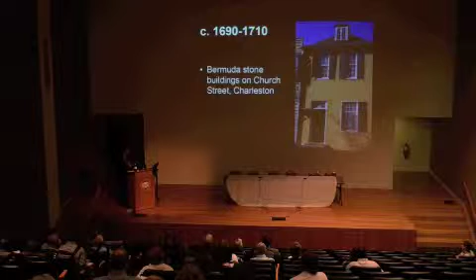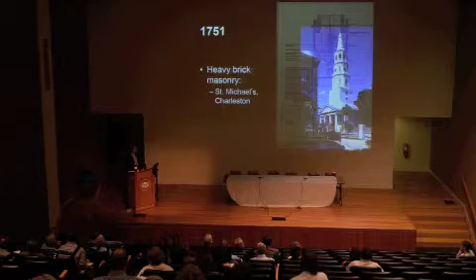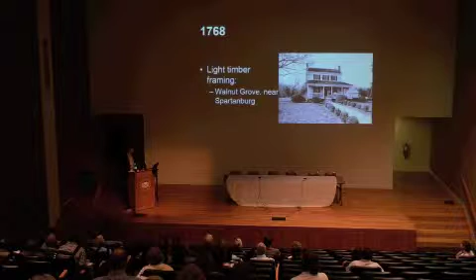1751, St. Michael's, heavy brick masonry. This building suffered significantly in Hurricane Hugo and had an awful lot of work putting things back together again. In the upstate, 1768, a light timber framing building up near Spartanburg.

Here's one I think some of you will recognize that has had one or two fascinating issues, because these are not structural problems. This is creep, and creep in masonry. We'll be talking about creep in masonry today.

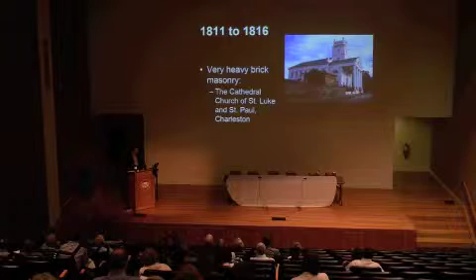The Cathedral Church of St. Luke and St. Paul, heavy brick masonry, and has had significant soil settlement issues. The trusses were damaged as a result of that.

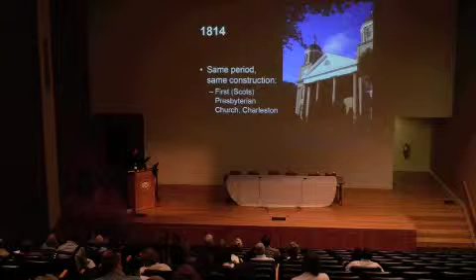First Scots has had a tremendous number of issues. One of the more interesting things is that—let's see if I can find the pointer on here. Yeah, there we go. If you look up here at the truss on the portico, if you climb up inside, you'll find that truss in particular is still smashed to pieces by a cannonball.

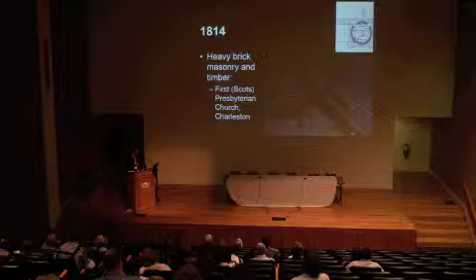So that's 1814. The towers are also tied together. They had some pretty significant earthquake damage. This is one that I know rather well, that's had some pretty interesting and significant structural issues.

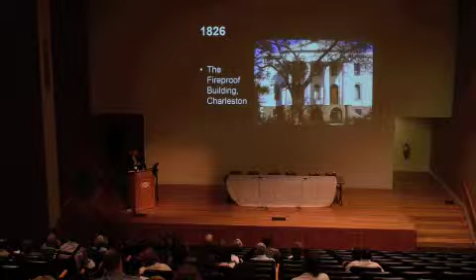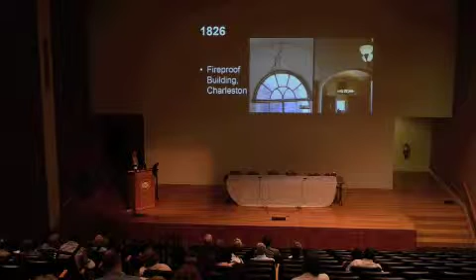12 years later, the fireproof building, Robert Mills, started to move on us, and we found that this thing was seeing some pretty interesting cracking. Fortunately, the South Carolina Historical Society has done a great job of dealing with the issues in that building.

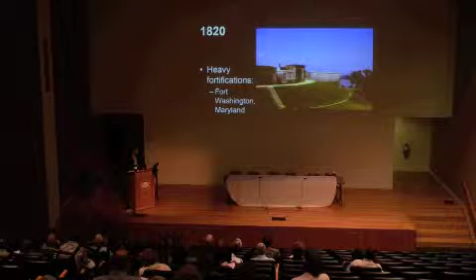There are examples of one of the owners that has really taken the bull by the horns and said, let's deal with it and get it right. And they did. 1820, we've also worked on a fair number of heavy fortifications that have more than their share of problems.

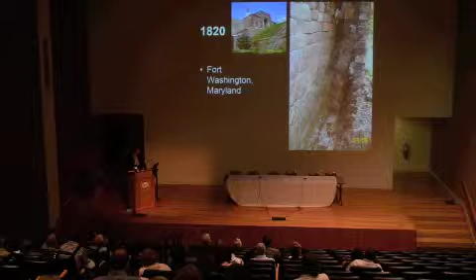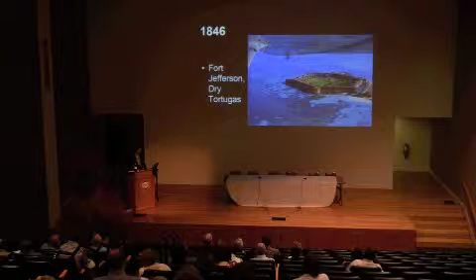When you see brick walls start to delaminate like this, then you know you've got something you've got to deal with. You really don't have a choice when you get something going on like that. Fort Jefferson, I've had more fun playing with down on Dry Tortugas and done a lot of work down there. That thing has had major portions of the fort separate, and we've had to rebuild parts of those.

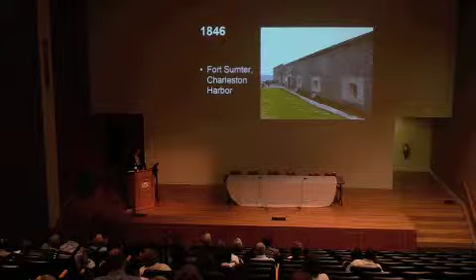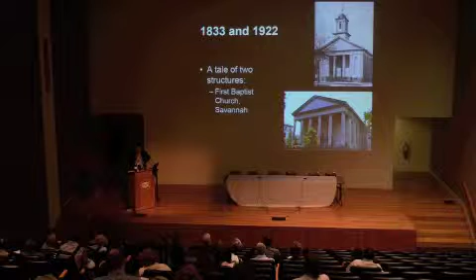Fort Sumter has also got some interesting structural issues, and they're dealing with them rather well. Coming a little bit into the modern age, both 1833 and 1922 - First Baptist Church down in Savannah has had major work done in the 1920s on an 1833 building, and that caused some interesting issues. We'll look at some of those, and we can see how we can learn from those too.

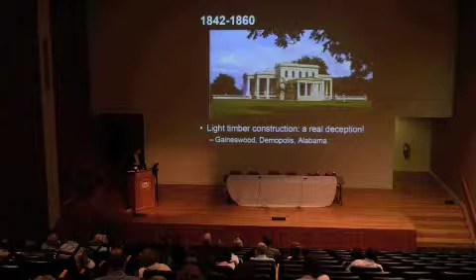Oh gosh, this is a wonderful building. This is a stage set - no, not a Hollywood stage set, an 1840s stage set. This building appears to be a masonry building. The walls are about 2 feet thick. Everything more than about 3 feet above the ground is actually timber framed, designed as a stage set to look like a masonry building. Fascinating, and I learned a lot from that one.

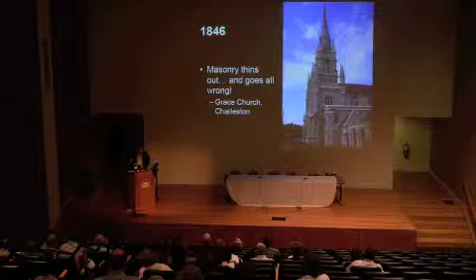Beautiful, beautiful building. We've done a lot of work on Grace Church, a fair number of things. Actually, here in Charleston, how many people are here representing buildings built before about 1840? Good, good. Masonry buildings before 1840 did very well. Masonry buildings after 1840, not quite as well. And we'll look at some of the issues that affect those.

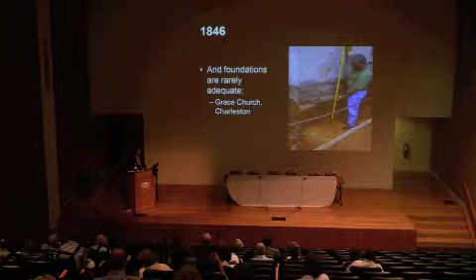Okay, masonry walls got a lot thinner about 1840. And we had some masons come down to help us rebuild after the fire, and things went really wrong. And foundations are sort of odd there at Grace - they went down 40 inches and started laying bricks.

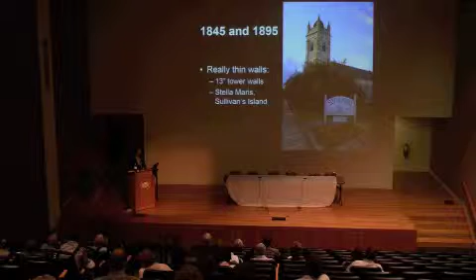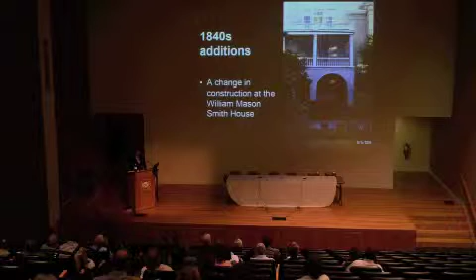The Stella Maris, very thin walls out on Sullivan's Island. Wonderful, wonderful church, 1845 and 1895, and one where we tied the building together. Another one that I know well, 1840s construction that didn't hold up as well here in this area as some of the much earlier parts of the building.

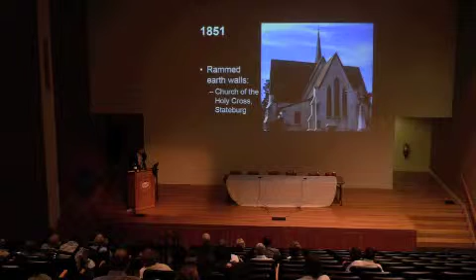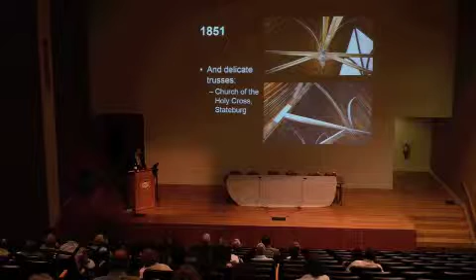Rammed earth, 1851. This building up in Stateburg, South Carolina, does not have masonry - well, it has masonry, but the masonry is rammed earth. And it has got beautiful trusses. Unfortunately, the earth let the termites get up fairly easily, and they did a horrible number on the trusses up there. Just exquisite trusses, though. Those are all repaired now.

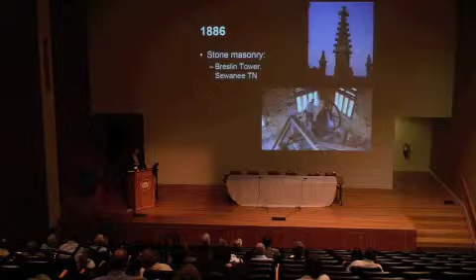1886, Breslin Tower up in Sewanee - a fair bit of work on those, including, or maybe I should say especially, the pinnacles. 1891, we were just going from iron to steel, and we've got iron - that is wrought iron, cast iron - and steel, all in this beautiful, beautiful church down in Savannah. The spire reaches 225 feet.

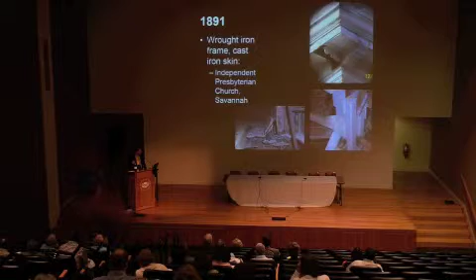Magnificent structure. Iron does not behave particularly well over time, particularly not when it gets wet. And we'll look at that.

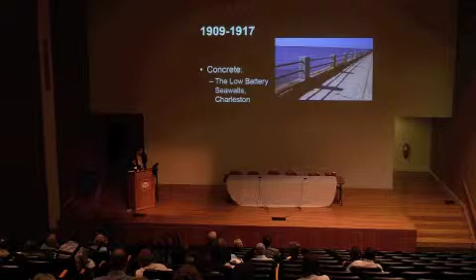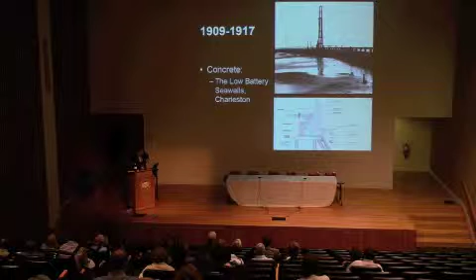Concrete behaves very well unless it has reinforcing in it. Oops - most concrete has reinforcing in it. The concrete that does not have reinforcing in it behaves extremely well. The concrete that has reinforcing behaves a lot less well. Here you can see parts of the Low Battery that have no reinforcing and have behaved exceptionally well, and a few parts that have a little bit of reinforcing and have behaved rather badly.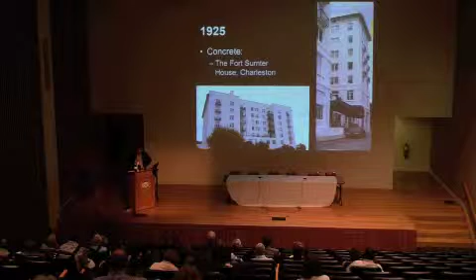Fort Sumter House is another example where the owners realized they had an issue and did a fabulous job of once more grabbing the bull by the horns and dealing with it. That's where they discovered they had reinforced concrete with corroding reinforcing, and so they've taken that and repaired all of it and done a fabulous job with it.

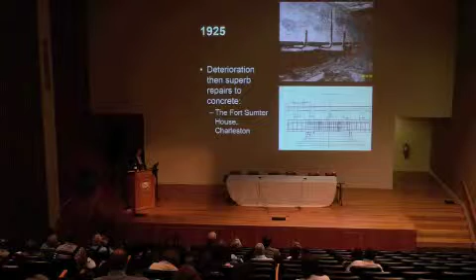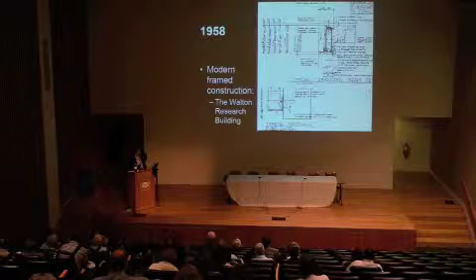The modern buildings have their share of problems too. Here we have brick skin on a concrete frame, and it did not behave particularly well. The brick grew, the concrete shrank - that's what happens, brick grows, concrete shrinks over time. When the two are next to each other and move relative to each other, they tend to break things apart.

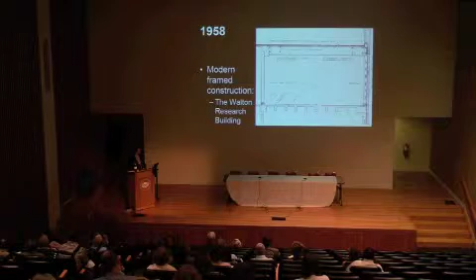The owners have dealt with this building really very well and have tied the brick skin back on.

Now, okay, we've looked at a number of problems very quickly that have affected a number of historic structures. What I want to come to now is the causes of damage in historic structures. First, we've got natural disasters like hurricanes, tornadoes, floods, earthquakes, insects. Man-made disasters like fire and war, material movement under stress, creep.

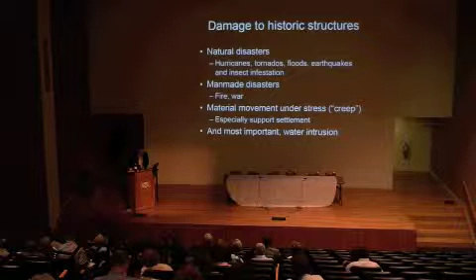And in particular, creep affects the soils - it affects timber and affects soils more than anything else. And then finally, and this is most important, please let's not forget this one: water intrusion. Water intrusion does more damage to historic structures than every other cause combined. Not necessarily faster, but it still does more damage.

Okay, we'll follow that with a look at some damage to structural materials. Here we talk about masonry, wood, iron and steel, concrete, and soil. Interestingly enough, I've put concrete in there. Most people don't think of concrete as a historic structural material, but it's becoming more and more so. Reinforced concrete has been around about 100 years as a structural material, and 100 years certainly qualifies under the historic category.

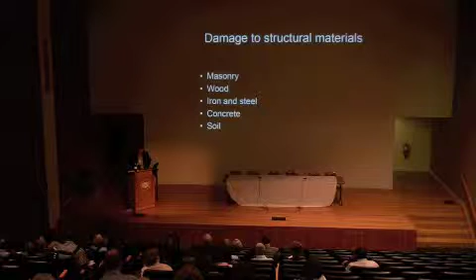Masonry deforms under stress, it moves under stress. It's damaged by corrosion of embedded iron, keep that in mind. You can have damage to the masonry units, bricks or stone, and you can have loss of mortar.

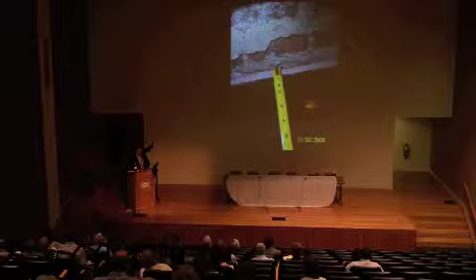We found that, yes, structures do move. We put our borescope into things. We had a bond timber, and we measured the distance from the top of the bond timber back to the masonry wall, this is a timber that's buried in the masonry wall. We had about 3/4 of an inch on top, but on the bottom about 3 inches. That's really odd. Well, what that meant was that the bricks on the top of this timber were displaced about 2.5 inches relative to the bricks below the bond timber.

The wall was delaminating. And when you see a masonry wall where the outside of the wall is no longer planar, then the wythes of that wall are delaminating, and that's exactly what was happening here. You can see these bricks are not in the same plane as the bricks up above. So we ended up having to tie this whole wall together.

After the earthquake two years ago, and this was Grace Church, this started moving a lot more, and we closed the church. The church said, okay, great, we got a problem, let's deal with it. And they did, and we tied that wall together very well. And everybody's back in it, and it's great.

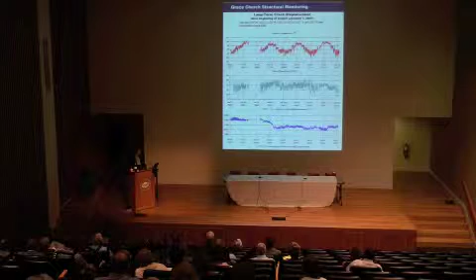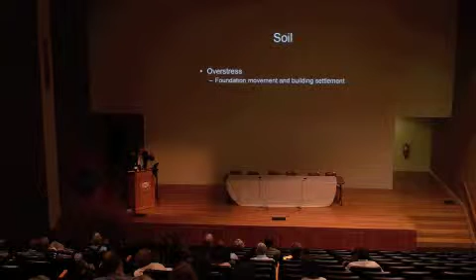There was a drought back in 1998 to 2002. Part of this building to the left was on piles, the part to the right was not, so the part to the right dropped as the foundation moved. A lot of damage, a lot of structural damage in there.

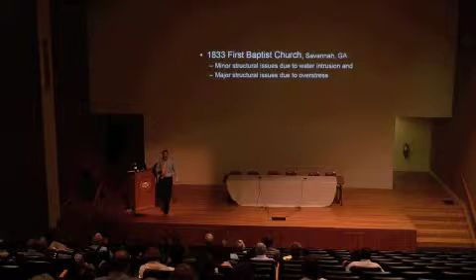Okay, First Baptist Savannah. We're going to look at an example here, and we're going to look at an example in Trinity, Columbia. First, water intrusion from 1833 to 1922, and then creep due to overload.

Somebody at the church noticed some cracks in the ceiling and said, huh, that's odd. Fortunately, he was an engineer and said, I don't think those cracks should be there. He was the same engineer who had spent months, almost as a hobby, documenting the trusses up in the attic, so he knew what was there. Knew that this was a problem, called us in and said, why do we have cracks in this ceiling?

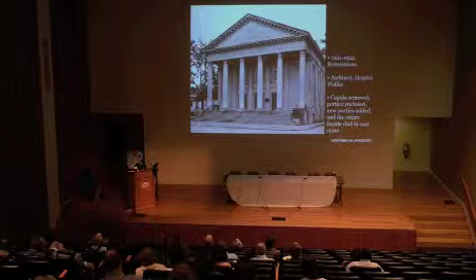In 1921 and 1922, the church went from this to this. Anybody notice similarity? You see these columns? Here they are right here. Major changes in the church, not just on the front, but upstairs too, up in the attic.

Here's the old truss. They raised the walls by about 4 feet, 5 feet, put a new roof up here and balanced it on top of the old trusses. The old roof was, interestingly enough, a tin roof, or what we call a tin roof. It was terne-coated metal.

And the new roof was a tile roof. Now, you don't have to be a structural engineer to understand that tiles weigh a little bit more than tin. Well, in any case, we found that the trusses up there were moving just a touch.

We went next door and looked back at the church and said, we can see the trusses up underneath the roof. What's the best tool you've got? Right here, all of y'all - your own eyes. Best tool you've got for evaluating buildings. Easy to do - just look up there and say, something's not right.

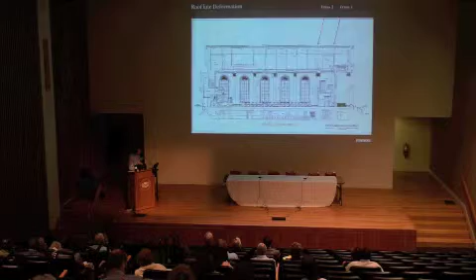Significant loads up there. Creep in the wood trusses, cracks, stuff starting to break up here and there, more cracks in the ceiling. So we went up there and evaluated the truss. Oh, by the way, there was an organ up there.

Evaluated the loads up there and found that, oh yes, some of the pins that hold the trusses together had sort of a funny angle to them.

Odd. And not only that, but the ends of the trusses - somebody buried them in some nice wet masonry. I've got another name for masonry, for brick masonry. I usually refer to it as a sponge, because it absorbs so much water and lets that water destroy any wood that it touches, just like a sponge does. Okay, so there were signs of water intrusion.

You might also note termite damage up here. If you ever see a piece of wood that looks like somebody ran a comb through it - termites. Okay, so we started doing a little digging and got down to the base of the trusses and found we could stick a piece of wood in the base way in with no trouble. And we found a fair bit of termite frass. Frass is a very fancy name for termite poop, and it's this yellow stuff you see on the outside of wood that termites have been chewing on.

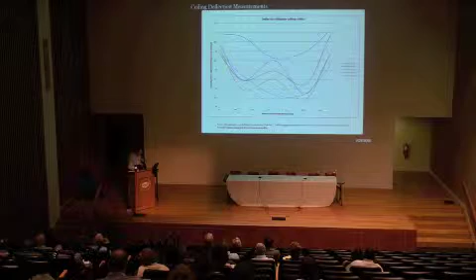Okay, so we did some measurements, took some simple laser tools in and measured, and found that the trusses sort of moved all over the place. And we did some testing - we found some voids in the ends of the trusses.

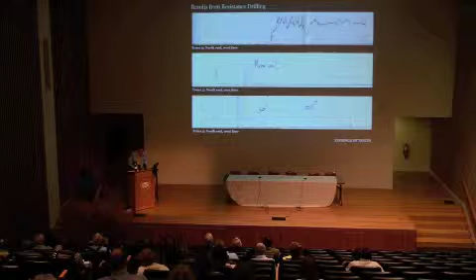We've got this wonderful drill - I don't think any surgeon ever paid as much for a drill as we had to pay for that thing. But this drill plots pictures of what it finds inside of wooden members. Very nice, and told us that we had all sorts of voids.

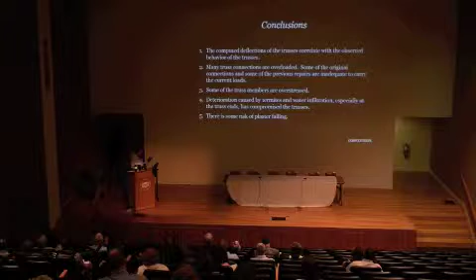We did a bunch of computations, and I'm not going to bore you all with computations, but we came to some conclusions that told us the truss connections - many of them were overloaded, some of the members were overstressed. But primarily we had deterioration by termites and by water infiltration, especially at the ends of the trusses. And if you look at your trusses, you'll find the same thing.

Sometimes, I hope not, but it sometimes happens. Okay, so we made some recommendations. We said, first let's monitor this stuff, and then we'll do some more examination, and we'll strengthen the connections and strengthen the trusses so that they can carry the weight of all that tile up on the roof.

Tile is made just like brick. Can you imagine stacking bricks on your roof? Okay, that's what tiles are. And we also put plaster washers in there to tie the ceiling back up to the trusses.

Trinity Cathedral up in Columbia had some water intrusion, an 1846 E.B. White building. We've got a few E.B. White buildings here in Charleston, like the College of Charleston, the French Huguenot Church, Randolph Hall at the college, Grace Church, and several others - beautiful buildings. But in any case, we were called and said, we've got a problem up here.

We've got some plaster deterioration. What's going on? Not only that, but the trusses seem to be separating from the walls. These are things you can look for in your own buildings.

How much time have we got? Okay, we got about 15 more minutes.

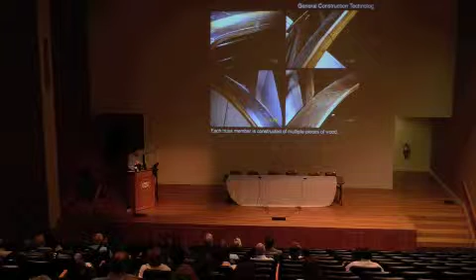We looked at these truss members - beautiful trusses up there, they really are - and asked what's going on. We found the trusses were built of many pieces of wood, with a tie beam at the bottom that had facing boards on it. We took a facing board off one and said, this is not good. I don't like the looks of this stuff - it looked like somebody run a comb through it.

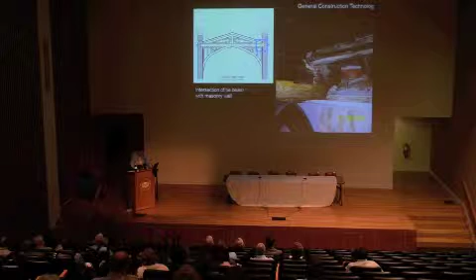So we looked in here to see where it intersects with the walls. Remember what we call those masonry walls? Sponges - nice wet sponges. So we have these wooden trusses sitting in these wet sponges, and they've been there since 1846 or 1851, so about 160 years of sitting in a wet sponge. I would look worse too.

Okay, so we buried ourselves in the trusses and said, what's going on? We've got some nice finishes - let's take those pieces of wood off and see what we get. We've got a couple of short videos, and I'm going to show you.

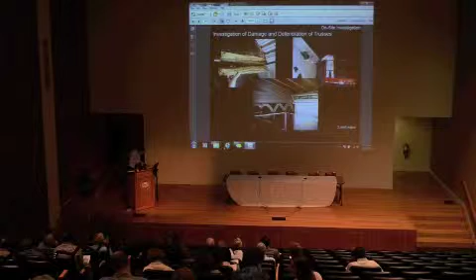Now that we've all been sufficiently impressed by the need to keep the water out of buildings, I'm going to return to this, and we'll keep going after I swap connectors here. Let's see if this will let me back in. Yes, it did. Okay, good.

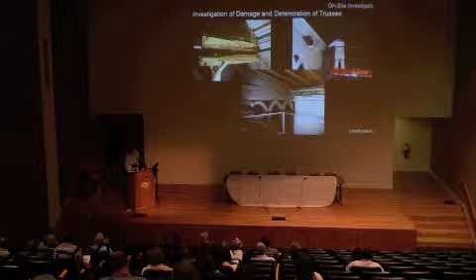So what we found up there was that water had gotten into these trusses and had done a fair bit of damage. We had termite damage, and then the trusses were separating from the walls, the roof line was deforming, sagging, and a number of other issues. Here you can see the termite damage in this area, and then trusses were separating from the walls.

If you're up on a roof, can you imagine that this used to be a straight line from here? Okay, now this is the reason that you keep the water out of a building, so that you don't have stuff like this happen.

We had a lot of severe wood deterioration at the masonry pockets and a lot of damage down in those pockets. I think you can see how the truss had moved right here - this is a truss up against a wall, one of the few places where we could see how much a truss had moved. There we go, and we had a lot of crushing and splitting.

Here we had the trusses right over top of the nave crossing, breaking to pieces - hollow by that time. And so the church did a wonderful job of going in and rebuilding those trusses. They closed down for an extended period, went in and rebuilt, and just did a fabulous job.

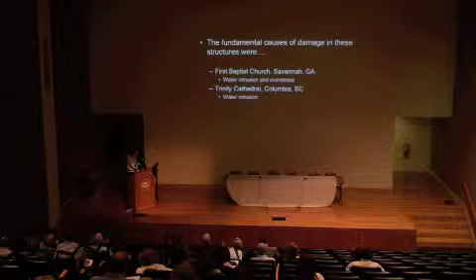Okay, we've learned that we've got water intrusion and overstress in one building and water intrusion in the other. There's no single cause of damage to historic structures that can compare with water intrusion. If you want a historic structure to last - other than not catching it on fire, which is surprisingly important - there's nothing you can do that's more important than keeping the water out of the building. You've got to do that.

Okay, now the obvious question is, how do you do that? I'm gonna, in about 5 more minutes, blow through the rest of these slides that show you how to do it. But while I'm doing that, I'm gonna pass out a couple of things.

I've got a handout that's a summary of this talk and points you to some resources, and a worksheet that you can use for evaluating your own buildings. But I'm going to point you primarily to one topic.

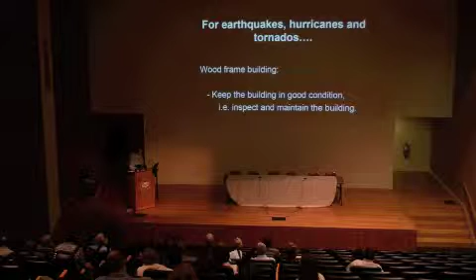If you've got a masonry building, inspect it and maintain it, and tie the walls and floors to the roof if they're not already tied. If you've got a wooden building, keep it in good condition, inspect and maintain it. For fire, have a detection system and a suppression system. For termites, keep the water out of the building. Have you heard that before? For creep, make sure stuff isn't overstressed. That's not easy to do in the room.

For soil settlement, maybe you've changed the pattern of water movement around the building. If you have something that's really overloaded, you might call and get some professional help on that one. Most of this other stuff you can do on your own now.

I'm going to point you to an inspection and maintenance repair guide. Sharon Park with the National Park Service—actually now with the Smithsonian, but was with the National Park Service for many years—has written a wonderful little preservation brief for us, number 47, on maintaining the exteriors of small and medium-sized buildings. I reference this in the handout, and I'm going to ask that you go on the web and find this and print a copy of it.

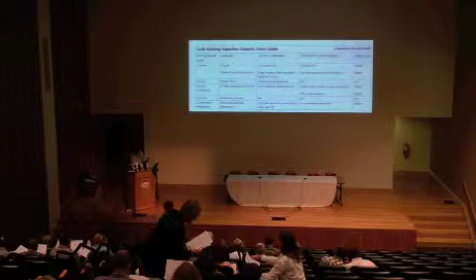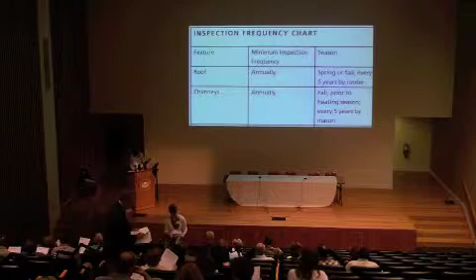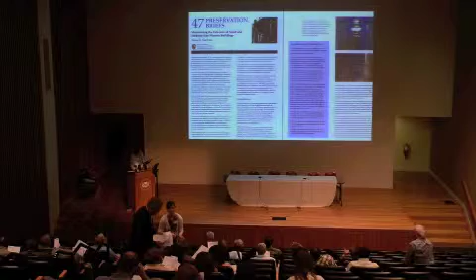Actually, there's a PDF file you can download that's easier than printing the web pages. This preservation brief tells you how to inspect your own building and how to keep the water out of it. I'll flip through it quickly—here's a picture of it. This thing has all sorts of guidelines for cyclical maintenance, that is, inspecting your building on some sort of regular cycle: how often should you inspect various parts of the building, and how do you inspect them? She gives wonderful guides as to how to do that, far more than I can cover in this lecture. But basically, here's how to go through and inspect your whole building.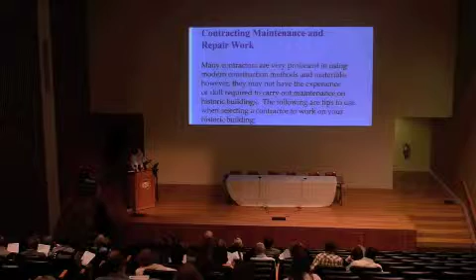And take care of the problems. She also gives you techniques on contracting out maintenance and repair work, and wonderful guidelines on how to do this. So I'm going to strongly recommend that you find Sharon Park's Preservation Brief number 47.

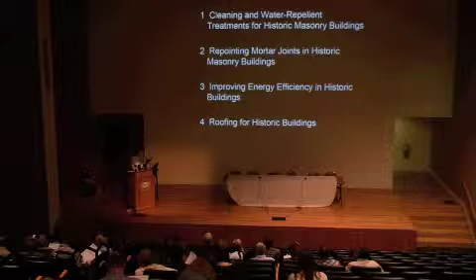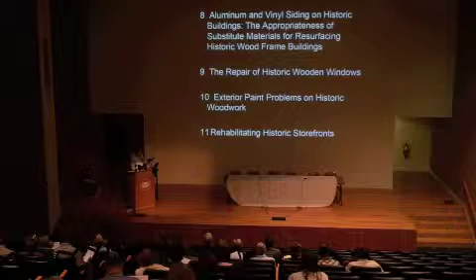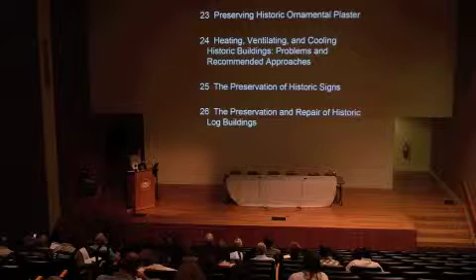So you go to the preservation briefs, and these briefs not only tell you how to inspect your building, they also tell you how to repair it—how to treat things like wooden windows, how to fix exterior paint problems. Wonderful preservation briefs on how to do thermal upgrades, preservation of historic concrete, how to rehab the interiors of historic buildings and identify character-defining elements, how to repair historic stucco and flat plaster, and preservation of historic log buildings.

So look for these preservation briefs, and when you get to the end, you'll find number 47, the last one, maintaining the exterior of small and medium-sized historic buildings, and that really applies to most of the churches we deal with, almost all the residential structures, and most of the churches.

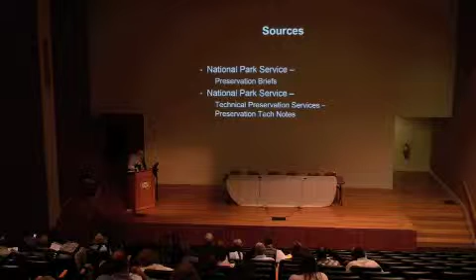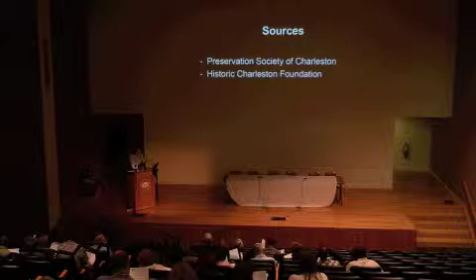Sources: National Park Service preservation briefs and their preservation tech notes, the Preservation Society of Charleston, and Historic Charleston Foundation both have some good resources on dealing with historic structures. And if you don't find what you need there, go to the black box—it contains all knowledge—you go to Google.